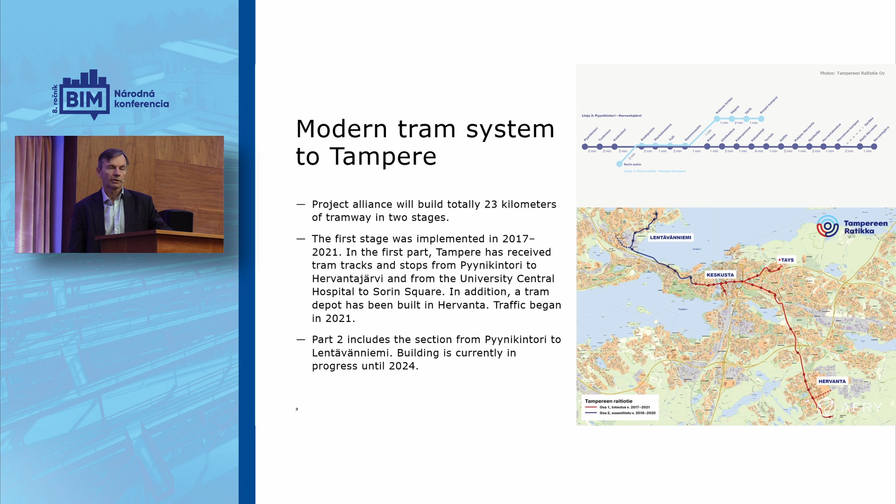So we were able to meet the budgets and the quality requirements. There is a reference story: the contractor is YIT, the largest contractor in Finland. If you Google YIT Tampere Light Rail project, there's a good description of this alliance contract model and of this project.

Okay, what we did from the BIM perspective. This was a project where we didn't have any collaboration tool. Each of the participants had their own BIM tools, and each discipline had their own tools. Some used 2D, some used BIM tools, and coordination was done by the main designers, but the main designer didn't have any coordination tool.

So how do you do the coordination if you don't have the coordination tool? Basically in the BIM world you just take all sorts of data formats, whether IFC, XML, or 3D DWG, and try to get the information together. The problem is with the data transfer, how you get that done when you don't have a common tool to transfer the information. So our main designers, who had the responsibility of the project, had to do a huge coordination and collaboration activity to keep everything on track.

I asked the main engineers how they did that collaboration, how they found out that their information was on time, accurate, and coordinated with the other parties. He said that sometimes he felt he just did it because of pure luck—there was so much to coordinate without a good tool.

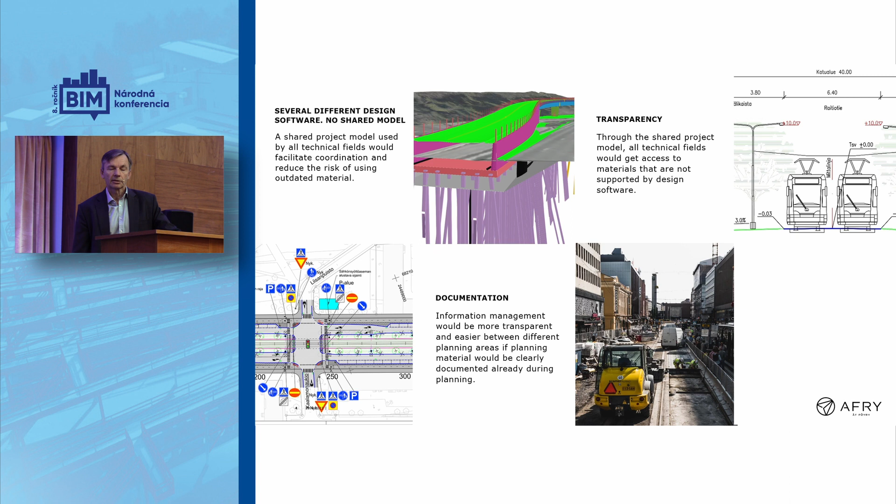So we use BIM in all aspects. We use 2D, and as you can see, those are just standard 2D DXF files that you transfer. Those with the domain knowledge understand what the 2D drawing is, but if you're from another discipline, you don't really understand what the other guys are doing. That's why we need the collaboration tool, and we need BIM in a coordinated manner.

So the next project is again a tram project in Helsinki. There's an English website, City of Helsinki project news—you can Google 'Kalasatama to Pasila in 15 minutes' and find an English explanation of what this project is all about. So we knew there's a new tram line, and this is a new project.

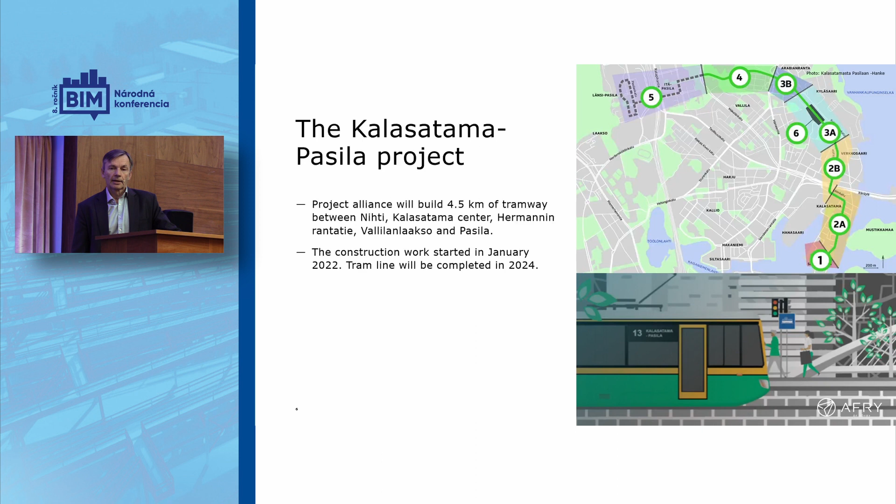Lessons learned from the Tampere project for our infrastructure team: we decided to do a lot of BIM collaboration. This is the first large infrastructure project where we've modeled pretty much everything, and we've put that together as one combined federated BIM model.

The impact is that once you start putting all sorts of information from different disciplines—like street lighting, traffic signs, everything—onto the model, you share what this project is all about with your client and with the other disciplines. We've used the collaboration tool called Trimble Connect in this case to put the information together, and that has also taken care of the data format problems we typically have with the project.

So the collaboration tool has data transfer capabilities by exchanging information through the platform. We are very much hoping to see IFC4 alive one day for our infrastructure project, because IFC is used a lot in real estate projects but less in infrastructure. Hopefully IFC4 development will see the daylight and we'll see infrastructure data transfer through IFC. But this is the tool we've been using now for collaboration and coordination.

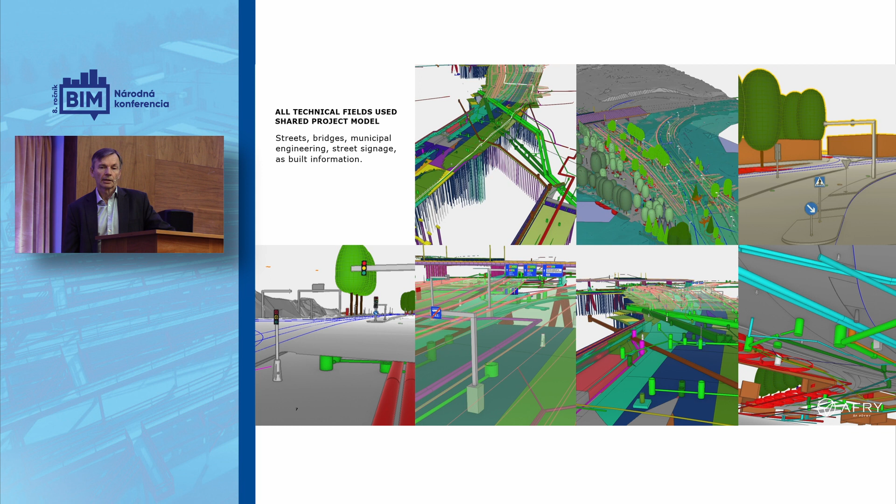Now the team has achieved a lot of benefits for their coordination work, and the contractor can really see what it is that they have to build. It's been really, really useful. And here's a few examples.

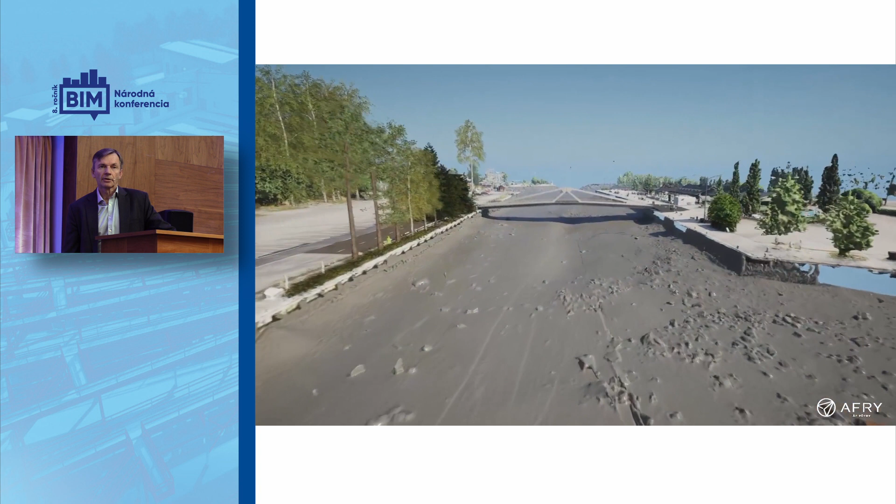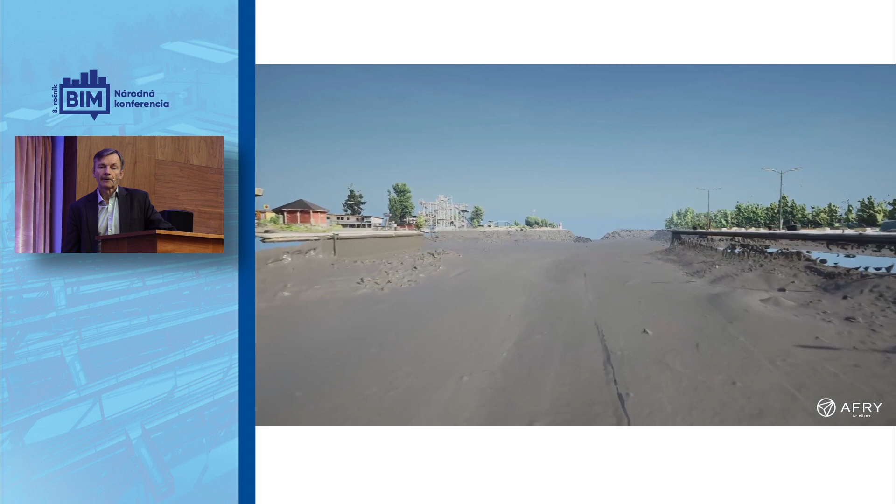Okay, as a last one, and this is what we are in the development phase. You take the new technology, and hopefully we got that. There's a video. So today you can obviously do the scanning. This is the bottom of the waterline there.

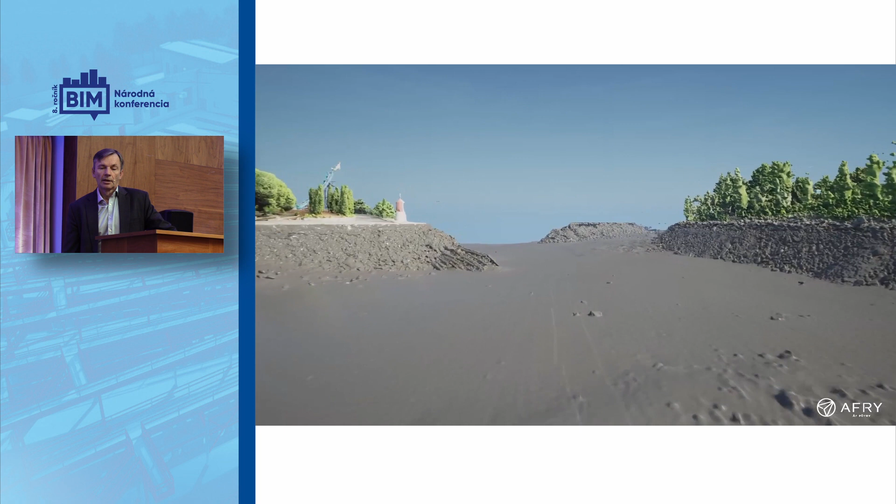So we have scanned the bottom, but not only that, we have also video captured the landscape, and those two models we have put together, and we have shown this to client in the preliminary design phase for client to understand how this really looks like, and they are expecting us to develop a bridge over this canal, and what sort of bridge needs to be developed to meet the client requirements.

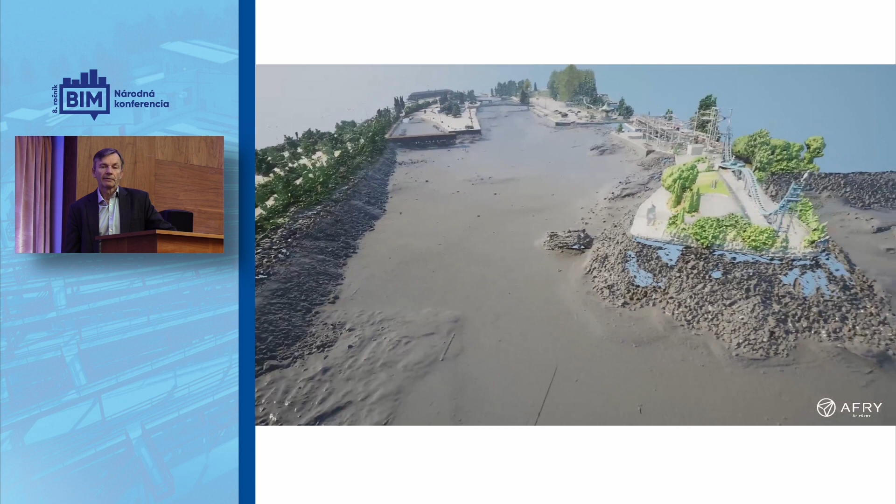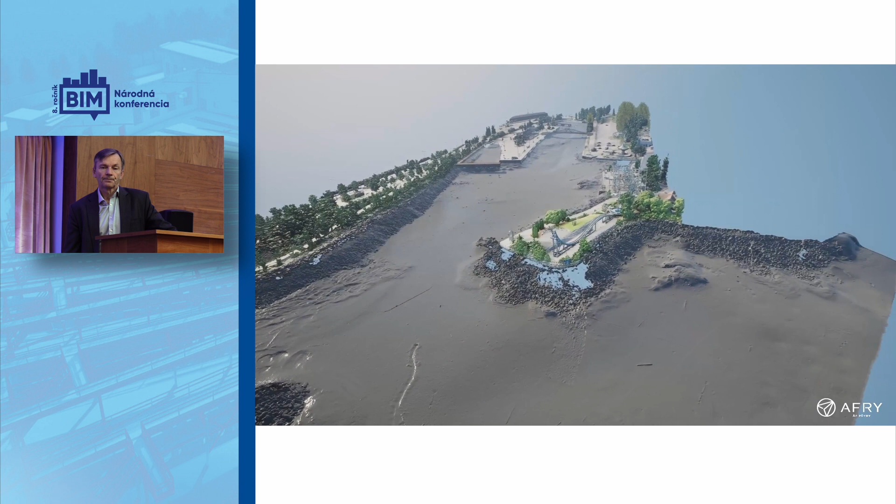So we have given them the landscape, we have given them the bottom of this waterline there, and we have given them a few design alternatives. You will see those in a second.

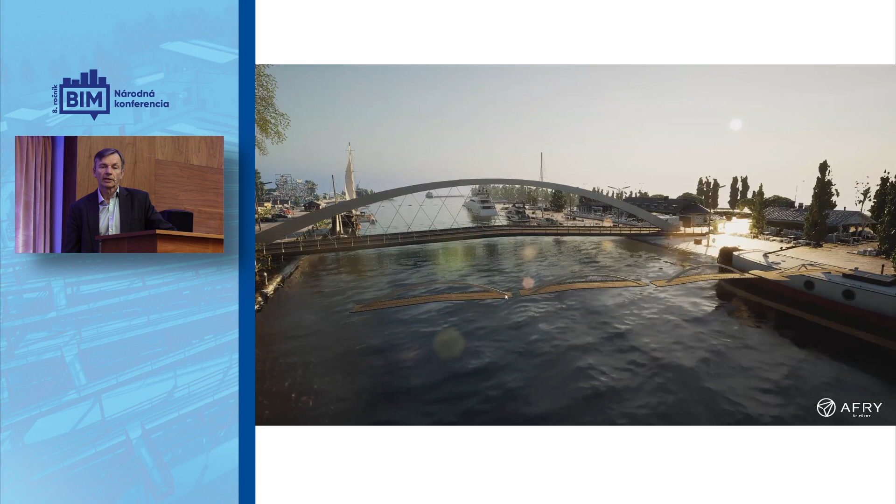So we have given them a few design alternatives, and also a simulation from different weather conditions, and also the daylight and the night view you will see, and you will see shortly a few bad weather conditions coming in Finland. Unfortunately, we have sometimes very heavy winters in Finland, so you will see some simulations.

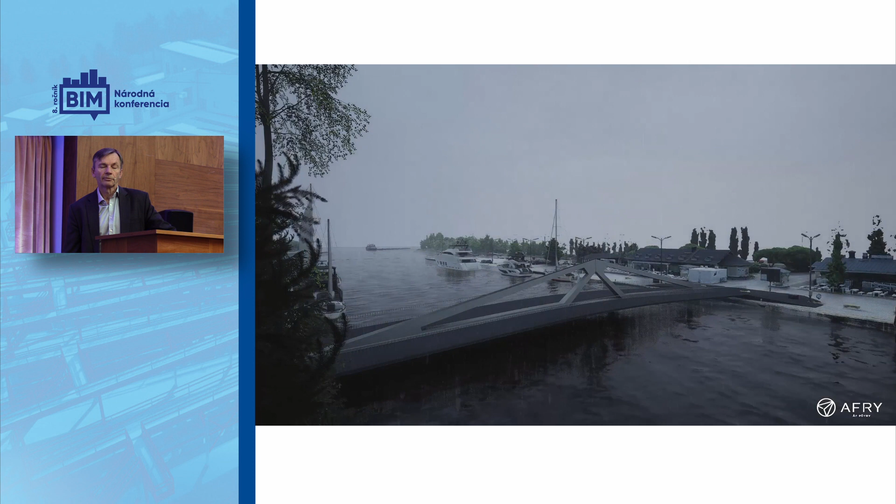In the pre-design phase, this is extremely important because once you start the execution, once you start the bidding with the contractors, you will fix the budget, you will fix the timelines, and it's extremely difficult to do modifications for the project afterwards. So we want to do this on time and give the alternatives to the client in a manner that the client does understand what it is that we are proposing.

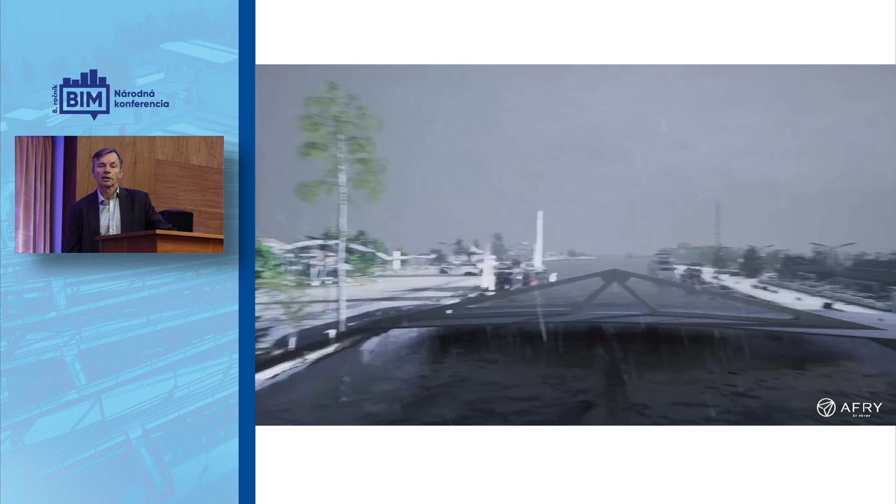And BIM is an excellent tool when you use the latest technology. Using drones, you get the captures, you get the videos very, very cost efficiently, and you can put the models together. You do a bridge like this in 3D in a very simple early pre-design phase, and you put the models together.

So this is really powerful when you have your client in front of you and you try to explain to them what it is that we are trying to develop here and how it will look like. And the client is extremely happy for their own decision making. What is it that they're going to build?

And we will have the commitment that afterwards we don't have to argue whether this scope is right, and we don't have to argue about maybe the project budgets and timelines afterwards. So this is the latest development that we have achieved.

The steps we took were the isolated BIM having the troubles of combining the models, and I'm sure you have that issue on your table today, many of your companies. The next development has really been these collaboration tools and how we put the information together.

So the main designers will achieve a lot of benefits when they get the combined model. And once they get the combined model, they can also agree on the accuracy of the BIM modeling. So it is not needed to model everything very precisely, even though it would be nice, but it would be taking too much time, it would be too costly. So there is an optimum of how much you model and what you model in detail.